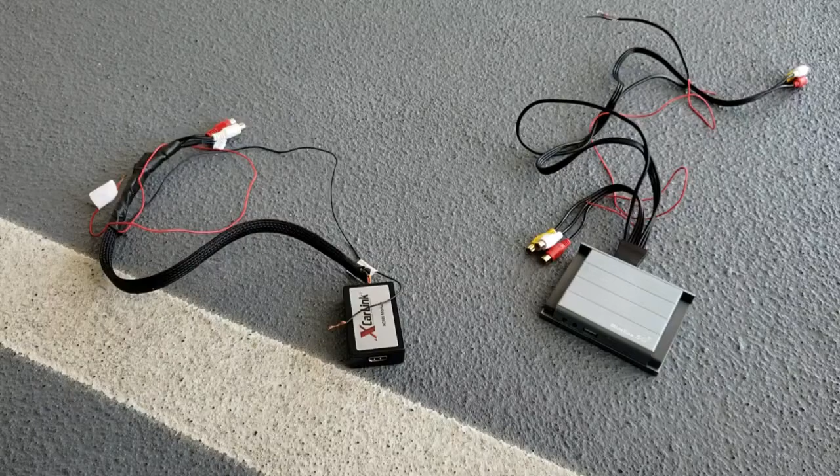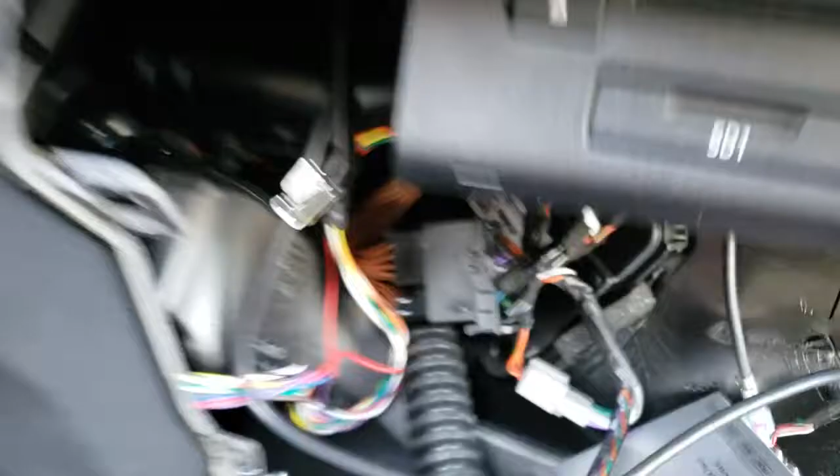Okay, I just removed the wireless box out of my car and the HDMI module and the cables that came with it. Here is the XcarLink connected to nothing, just the audio and video cables that come to the screen, and the power cable is just gonna sit here. Since there's nothing connected, I'm not gonna connect anything, but without the HDMI and wireless, I cannot use this for anything. I don't have an external camera to connect because my car already comes with a Prestige system with surround view cameras, so I don't have anything to do there.

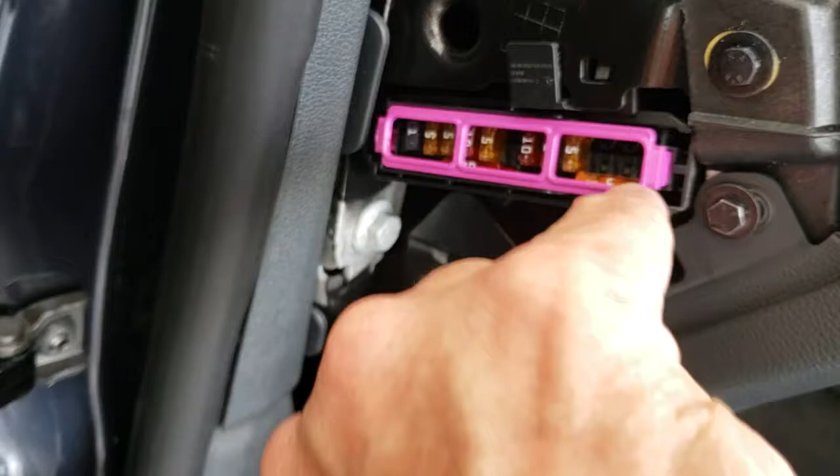And to show you something about the fuse box, I took out this pink cover and tested all those fuses here, and even with the door completely closed and ignition off, I still have power to it. I'm going to show it to you right now.

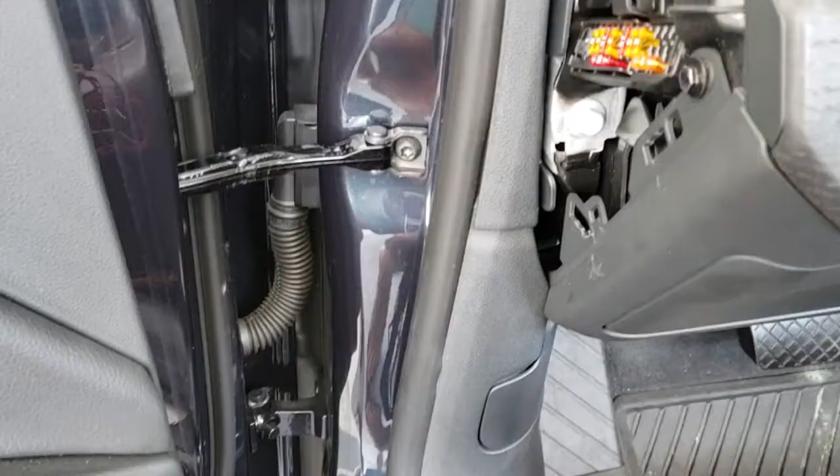So I removed the pink cover, and this is the fuse box, what it looks like. I also bought the cable you guys recommended, which is the patch cable.

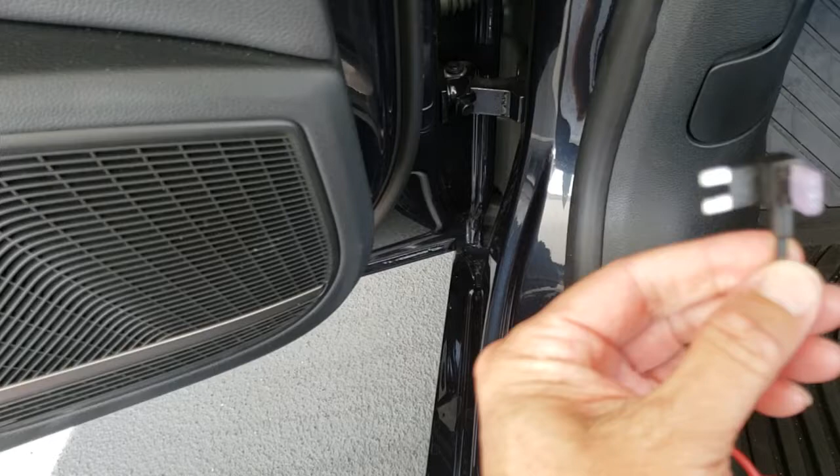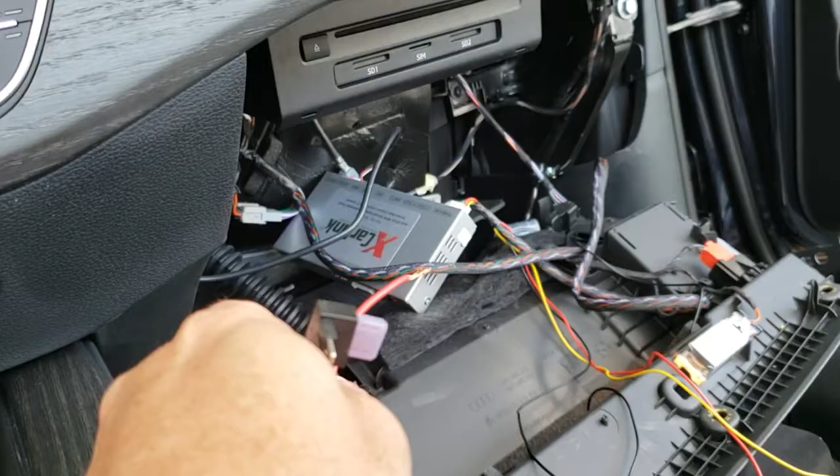I learned from looking at the instructions that I also bought an extension cable, as you can see here. So I cut this cable to be long enough to go all the way from here to there underneath. I'll probably build that up, and I got it here. This eventually will connect to that cable over there to get the ignition for the XcarLink's box. So this is the cable.

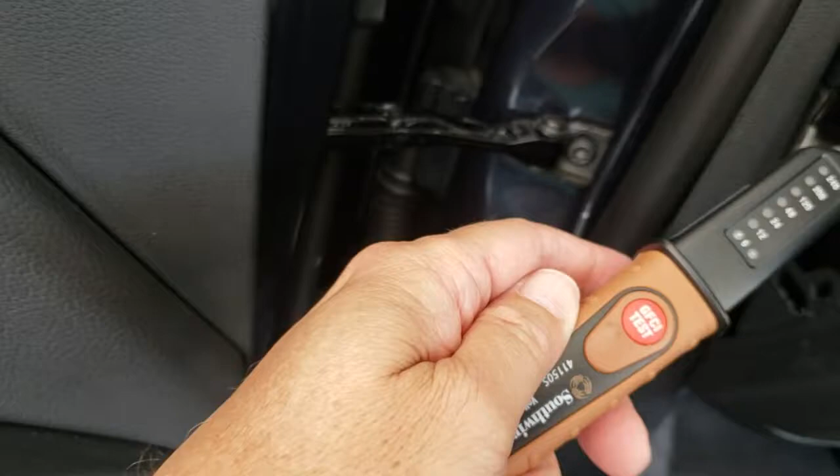But right now, as I connect it to any place on the box, I get continuous power everywhere. So I'm gonna prove to you that they all have power, even though the ignition is off. I don't have the car on, everything is off. I bought this simple tester that you connect one end to the fuse, and it's gonna show that it has power. Let's see if I can hold this camera so you can see it.

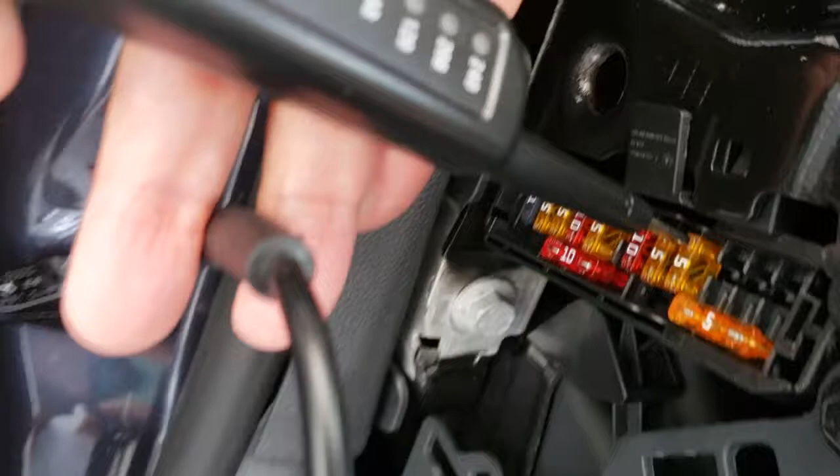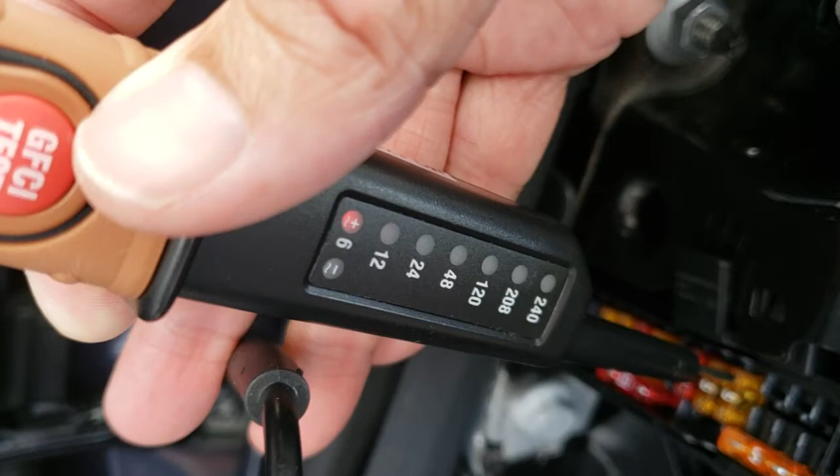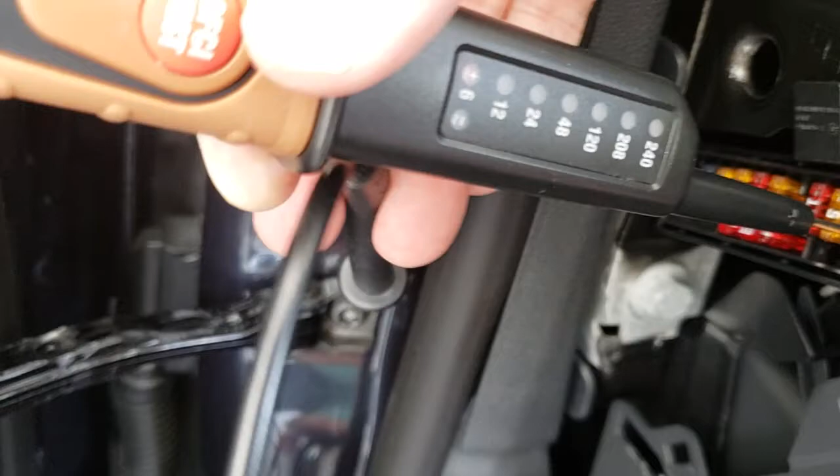Okay, so here we go. I connected this end to this one fuse, and see, I put it here, and the light is on, showing it's 6 volts plus, and I connected that to anywhere on the car itself. If I move this to the lower part of this fuse, I also get power. Oh, I gotta connect to the... and now I have power.

I have to connect this here. I only have one hand, so now I still have power coming, and I'm on the lower part of the fuse. So the fuse here has power all the time. It's not supposed to be, it's supposed to be just for the ignition, right? So I want to try this 10 amp here for the same thing. 10 amp, oops, I have to get it over here.

Same thing, I have power. I only have one hand to do it. Here we go. As you can see, there's power there. So I tried all those different fuses here. I don't know if I missed one or two, but looking at the fuse box, all those are supposed to have power only when something is on.

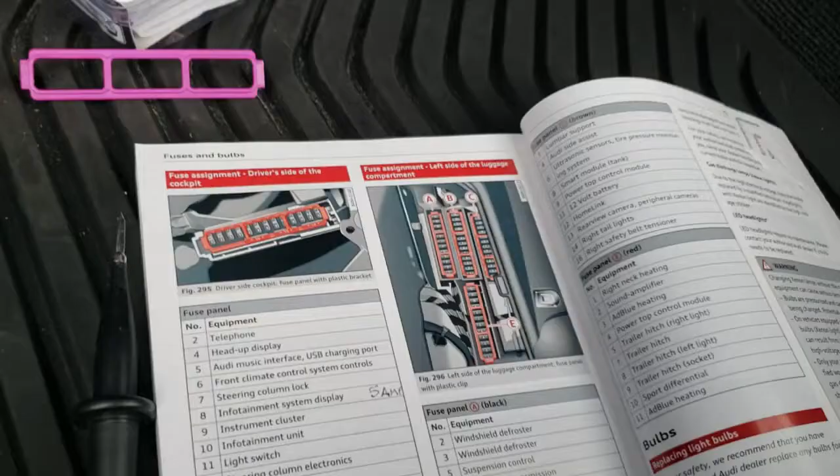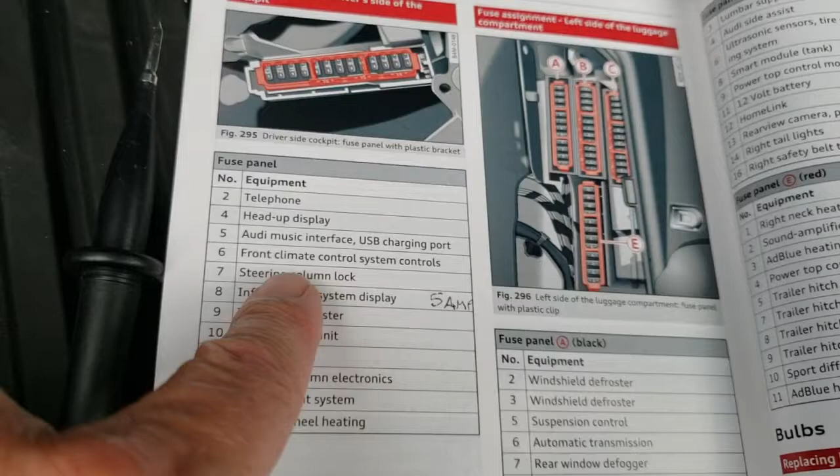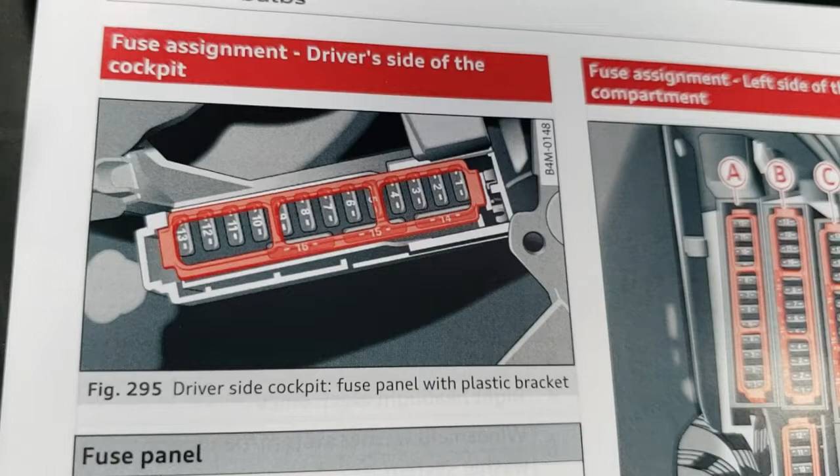I'm going to show you now the diagram of the car itself. Okay, here's the manual of the car, and this is what this is, right? As you can see, the infotainment display is number 8 on the system, which is the 5 amp. I located it here by counting 1, 2, 3. If you look in the picture real close, you're gonna see the numbers 1 through 8, so I counted the infotainment system display.

That means if this screen here is off, this should not have any power on this one. And if you count 1 through 8, it's this 5 here. I tested this 5, and it's on all the time as well.

So I don't know how to test it differently, because if I just put the tester on one of those connectors and connected the negative into it, it will get power. I want to do it again just so I see it. Yep, I see it, but I cannot prove it to you because I only have 2 hands. But I do get power, and the car is completely off. Nothing is on, no screen is on, nothing.

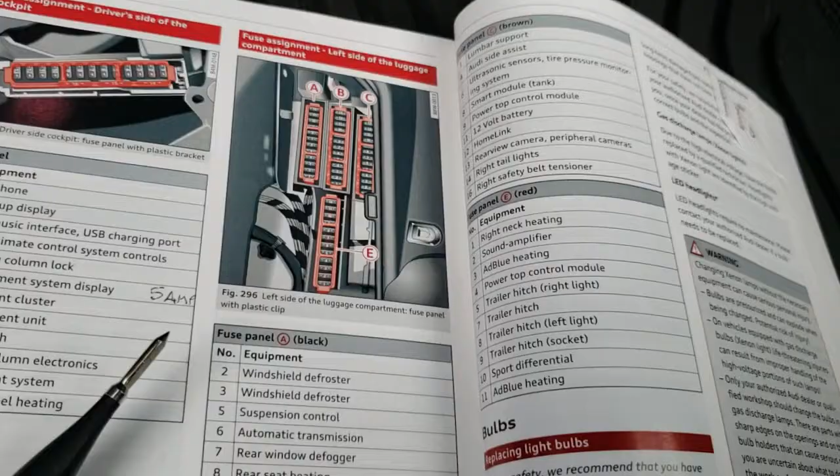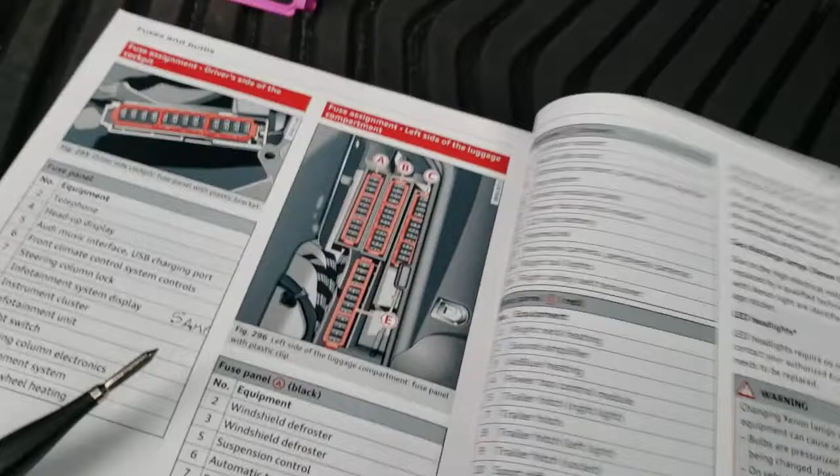So I don't know what this fuse is supposed to be, unless there is a timer after like 10, 15, or 20 minutes that will lose power. But I tested it and it's on right now. If the car has been off for the past 5 or 10 minutes, I disconnected on purpose. There is also this other box, the other fuse here, which I believe is underneath this pedal, the foot pedal. I haven't tested that, but perhaps one of those fuses could respond when the car is off and the power is off. I don't know, but as we know, this is what it is.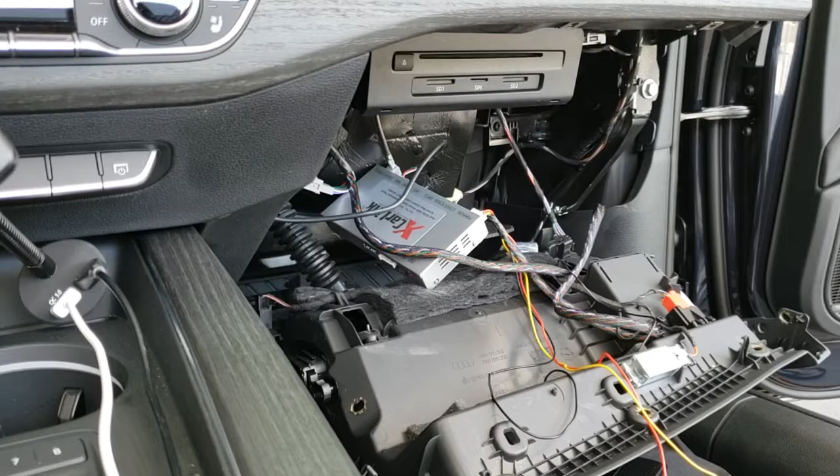I did buy the cable that you told me to, and I saw that you have to put an extra fuse here that comes with it. You put it at the top, at the bottom, and connect it here, or this way. Now I got it all figured out. I learned how to do that, but the problem is I always get power here. So if I'm always getting power here, I'm getting power there also the same way. I just connected to one of those red wires and was able to get power, but it stays on all the time, and that defeats the purpose, because the box stays on and warm, probably draining the battery of the car all the time.

So I need help identifying how and which one it should be on, especially when your Android box comes. I hope the Android box will come and will be feeding off of the other box. So let me know, please.